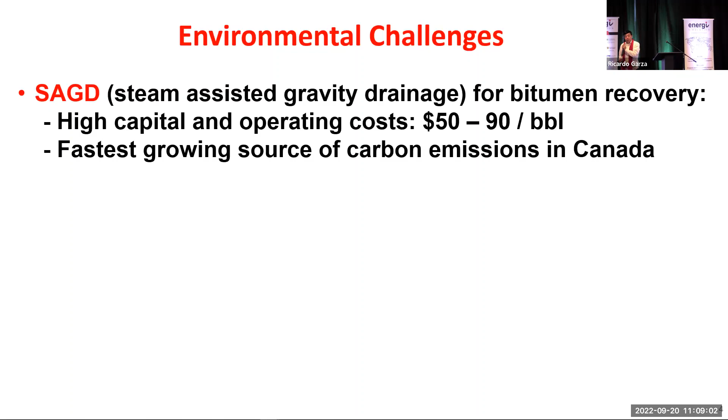So, as I mentioned, currently bitumen is produced by steam, and the high capital cost is about $50 to $90 per barrel, depending on companies. And also, as I mentioned a moment ago, bitumen production is the fastest growing source of carbon emissions. And the Canadian target is to reduce carbon emission intensity by 30% by 2030. And by 2050, the entire country is going to achieve, or internationally achieve, net zero emissions.

So to address this issue, the government intends to increase the carbon tax from its current level, $30 per ton, to $170 over the next 9 years. So that's really the issue. That's why in the industry, even though the oil price is very high, $80, $90 per barrel, you don't see big investment.

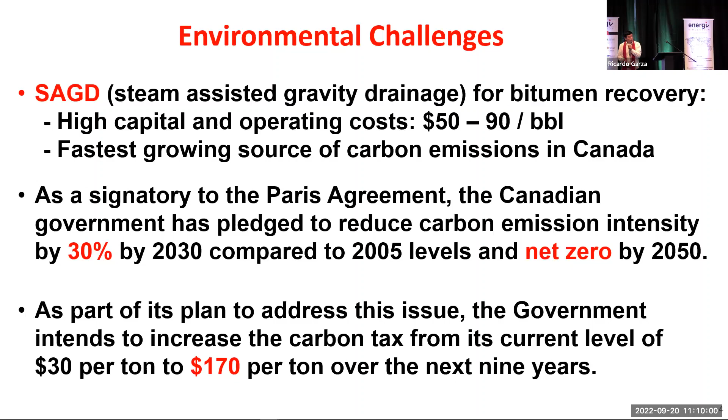Those are the problems: carbon tax and the target. And in our overall research, our chair, in the past 4 or 5 years, we try to reduce the cost and reduce greenhouse emissions by developing new recovery processes, for instance, steam plus additive. The additive at the moment is solvent for the bitumen.

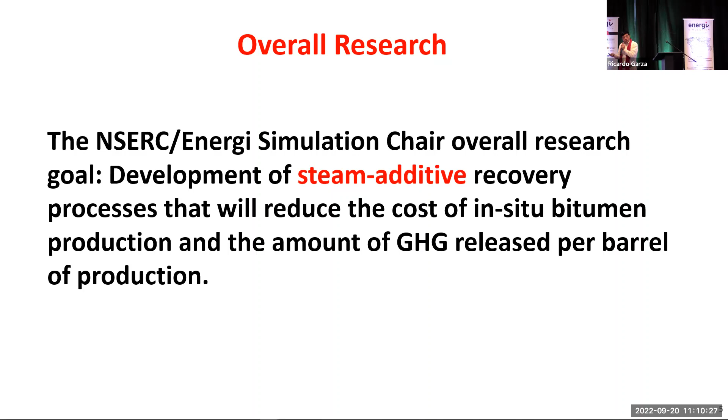And last year, at the same summit, I gave a talk about the lessons learned from research pilots on solvent steam co-injection. And then I was invited to write a paper. This paper summarized all the industry activities up to the end of 2021. So if you want to understand more about the current pilot tests or even some of the commercial projects, you might refer to this paper. It was published in the April issue by the Canadian Heavy Oil Association.

So we try to reduce the cost and the carbon emissions, but still we have a problem, as I mentioned. And also, again, steam plus solvent, we also look at it. One of the solvents is DME, the novel solvent. The year before last, I made this presentation. Now, for instance, there's a consortium of different companies, Cenovus, Enbridge, Suncor, and others, looking at DME. They're talking to us and looking into the papers we published. And also ConocoPhillips is looking at DME as a solvent.

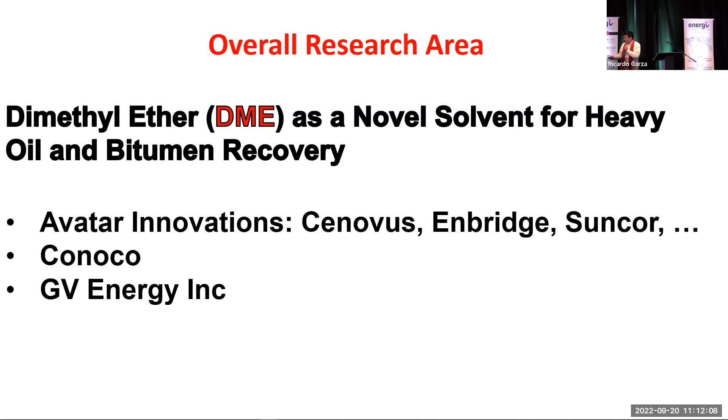So again, we made the presentation and the industry listened. But still, there are issues. This is one of the possible solutions, but based on the issues I mentioned, what is our strategy? Our strategy, as I mentioned, is CCUS plus blue hydrogen. If the government listens to us and we push this further, I think we have a good future. As I mentioned, CCUS is not only used in fossil fuel utilization and recovery, it's also used for hydrogen production.

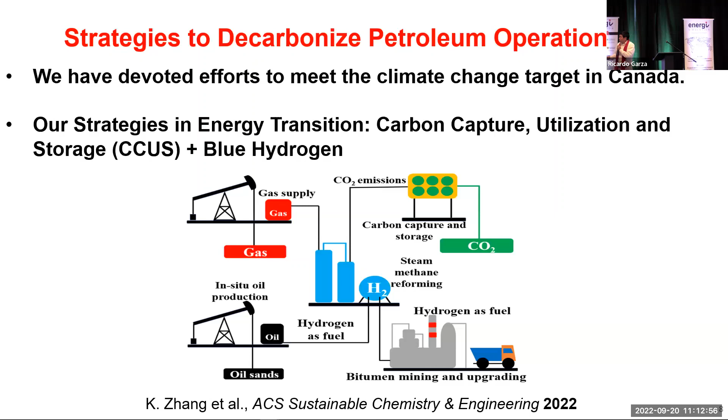So let me first very briefly summarize what we have done in the past to decarbonize petroleum, oil and gas in general, and then I'm going to switch to bitumen. In the past, a lot of people here did a lot of research on injecting CO2 underground to improve oil production. In the lab, we see a 10% or 15% incremental increase. In the field, I always say, if you see a 1% increase, that's like discovering a new big oil field. Look at how much oil we produce per day. So that's one area we have worked on intensively.

The second area: from the beginning of this century, industry was looking at unconventional oil and gas, for instance, tight and shale and coalbed methane. If you want to store or sequester CO2, CO2 can replace methane in shale reservoirs. So you increase gas production and also store CO2, because the CO2 adsorption capability is much stronger than methane in shale and in coal.

And also we started underground coal gasification. Remember, underground coal gasification created a lot of cavities, so use the cavities to store CO2. And this was our first proposal: in the past, industry stored CO2 in the supercritical state. We propose you store CO2 as a hydrate. This way, storing CO2 is much safer and stores about 3 times more in terms of quantity. So this is what we have done traditionally.

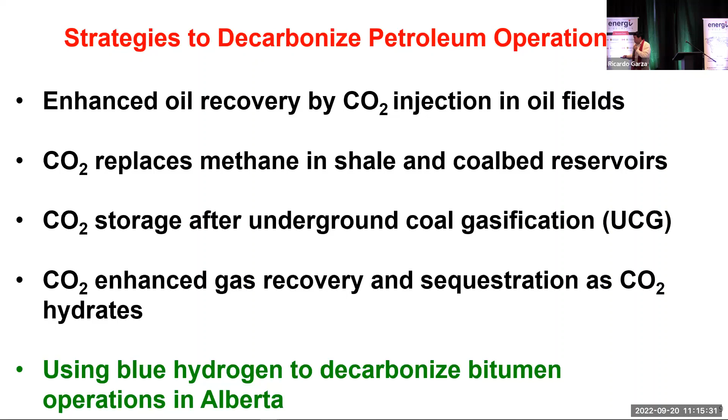So remember, as I mentioned a moment ago, the decarbonization of the bitumen operation in Alberta is the top priority to meet the CO2 emission target. And oil and gas emits the most CO2, for instance, 191 million tons per annum. And we propose in this research, and not only we propose, when we talk to government and industry, we push this. Again, I think this is a good future.

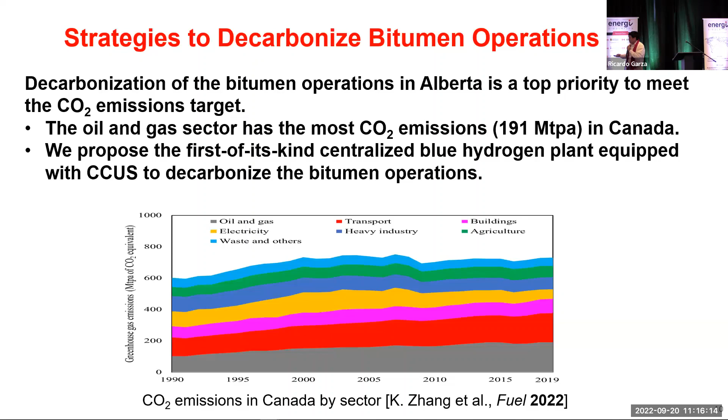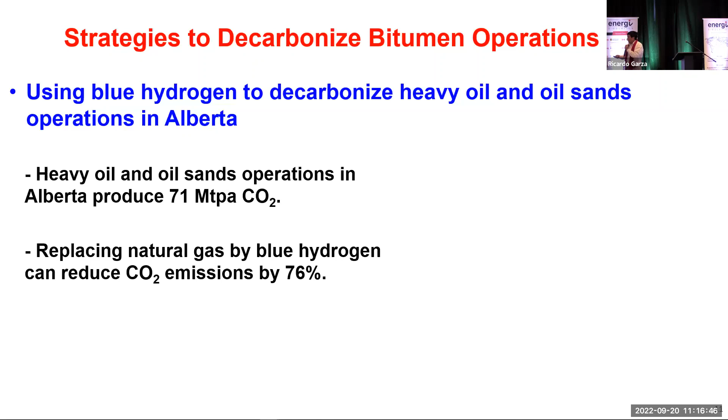And also we did a lot of analysis about the CO2 emissions for different sectors. So what we do is we use hydrogen to decarbonize the heavy oil and oil sands operation in Alberta. The heavy oil and oil sands operation, mostly from bitumen production, produces 71 million tons of CO2. And if we replace natural gas by blue hydrogen, we can reduce CO2 emission by 76%. We did a lot of analysis. Again, this is reliable analysis. So this replacement will be profitable.

Remember, we're talking about the carbon tax increase. When the carbon tax exceeds 89 per ton, the milestone year is not far away, 2027. At the very beginning I mentioned, we don't see a very clear future for the oil and gas industry. But if you follow this approach, I think we've got a good future. We've got a good future.

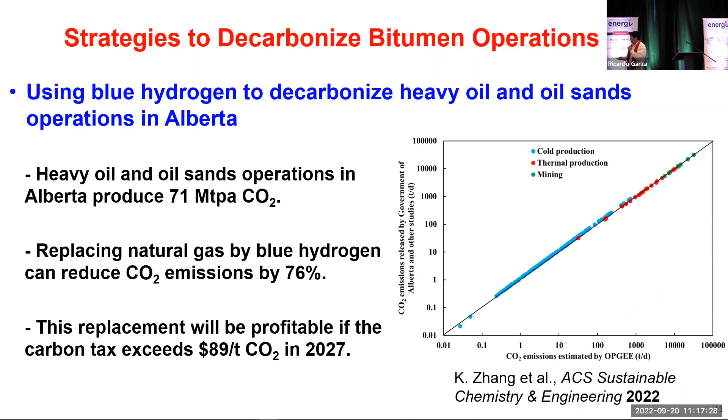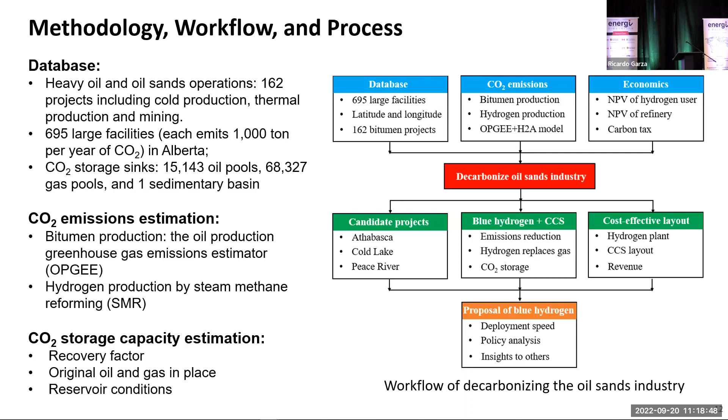And again, we have to analyze the CO2 emissions from the bitumen producers, this gas emission. Also, as I mentioned, when you do the reforming, for instance from natural gas, you also produce CO2. And then you gather all the data, analyze all the CO2 emissions, and then see where we store them and how we utilize them. So this is the methodology, process, and workflow. And so these are some of the results.

Based on the 162 heavy oil bitumen projects in Alberta between 2020 and 2050, the heavy oil bitumen production will reach, let's say by 2030, 4 million barrels per day. And the CO2 emission will reach this much and at this rate. And if we use blue hydrogen to replace natural gas as a fuel, 1.5 trillion cubic feet per year will be saved. And this much hydrogen will be consumed for steam injection and for heating. So these are the analyses. We did a lot of analysis about this one.

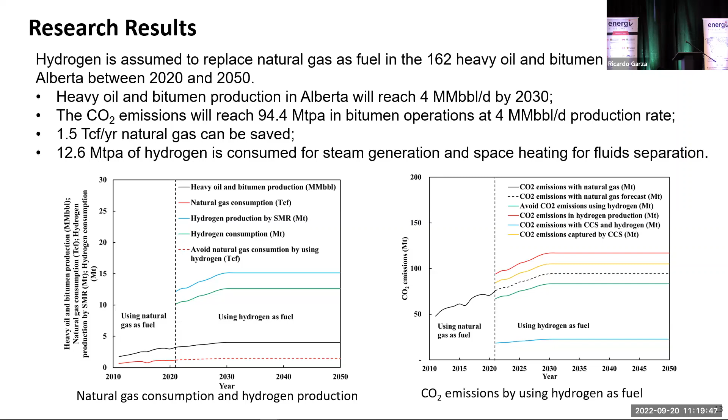And also, as I mentioned, assume the gas price is $3 per MMBTU, the CO2 capture rate is 90%, and the blue hydrogen production cost is this one. So when we do all the financial analysis, the economic analysis, we'll see, as I mentioned, when the carbon tax rate is this one, in 2027, all the industry, no matter how they increase the carbon tax, makes a profit. At the same time, they're going to reduce the CO2 emission by almost 80%. So that's a win-win situation.

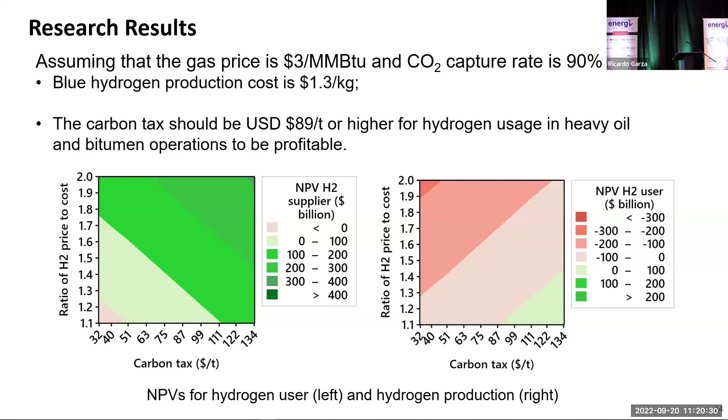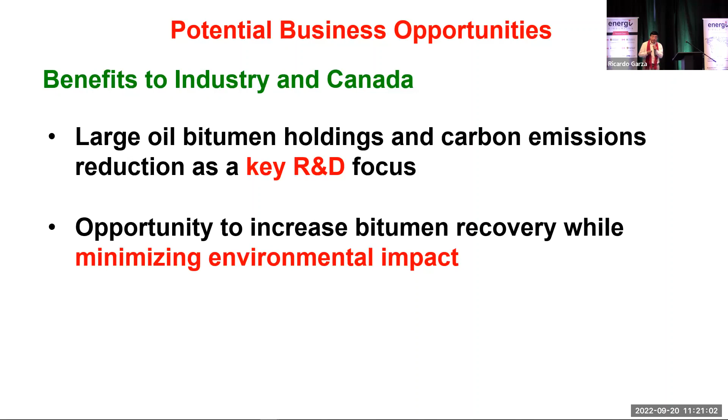So, as I mentioned, that's my idea. And again, the business opportunities: as mentioned, Alberta has 1.7 trillion barrels of bitumen underground. There are large bitumen holdings and also the carbon emissions. So there are opportunities to increase bitumen production while meeting the target and also making a profit. Again, we started this and made some effort in this area. In the future, we can continue on CCUS plus blue hydrogen. I think this is the good way. If there's no other potential way for the government and industry to go, I think this is the right way.